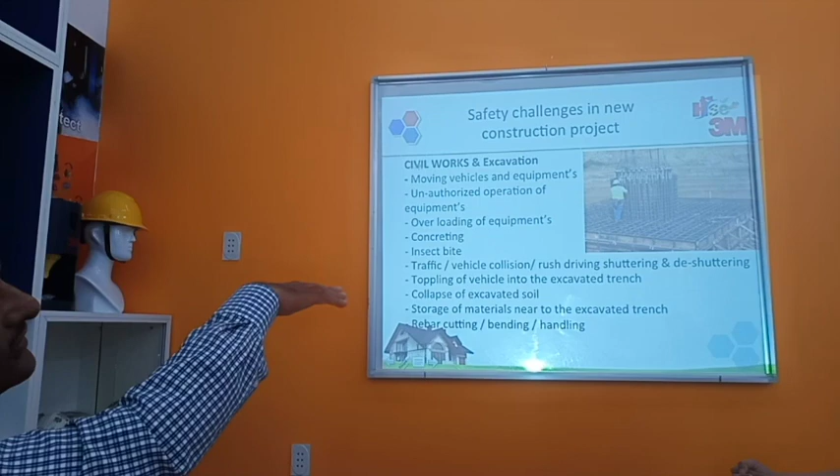safely. Reinforcement handling: depending on the size of the foundation, there will be a lot of reinforcement handling. You can keep the previous one. Yeah, reinforcement handling. This is the area where the majority of accidents happen. Depending on the type and size of the reinforcement, many times they involve the crane to shift the materials. So there will be moving equipment and unauthorized operation of the equipment.

It happens many times, mostly because people who are helpers or flagmen assisting the equipment used to operate the equipment. They don't have a license, they are not authorized to operate, but they want to learn and they operate the equipment. Overloading of equipment while loading the reinforcement, etc. Overloading of equipment also happens.

Concreting is also one of the challenging tasks. When the concreting starts for a large foundation, it may be for the whole day sometimes. So the workers remain without rest many times because of the long working hours. Proper lighting arrangement should be there. There will be vibrators for the concrete. Vibrators should have proper earthing because they're operated by electricity.

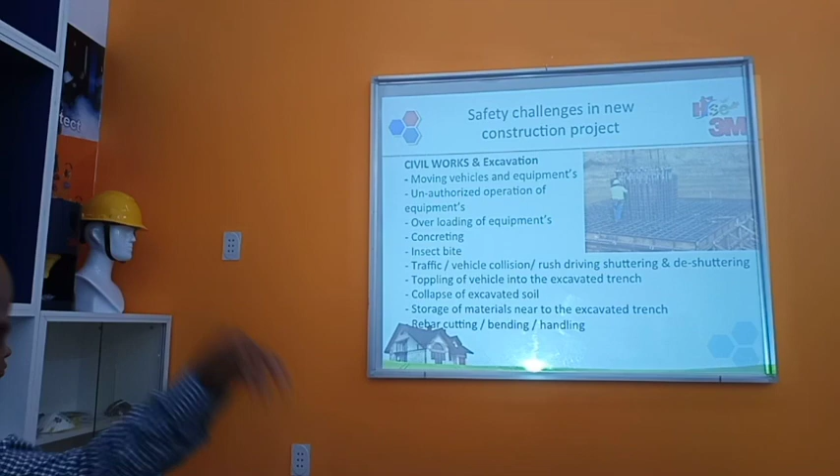And the equipment coming to deliver the concrete: we need to see that it should be 1.5 meters, 2 meters away from the edge. Otherwise, there is a possibility the equipment itself may fall inside the excavated trench. So these are the things we have to take into consideration.

Insect and animal bites, like a snake or scorpion, or even many times dog bites in the construction areas, because sometimes there is no control of the food waste. People eat and throw things here and there, and dogs and even pigs come. In India, I experienced two dog bite cases.

Dog bites, yeah, and two times the pig, the black pig, the forest pig. The pig also bit the engineers. Oh, pigs can enter into the site? Yeah, because it's a very huge construction site, 60 kilometers long. So it's very difficult. Sometimes the fencing work is going on, so they can enter very easily.

Traffic also is one of the biggest challenges, particularly during the construction stage. Vehicle collision, rash driving, people used to drive very fast. Also the parking arrangement, we need to have a proper parking arrangement. Otherwise, after completion of the job, people will park the vehicle here and there.

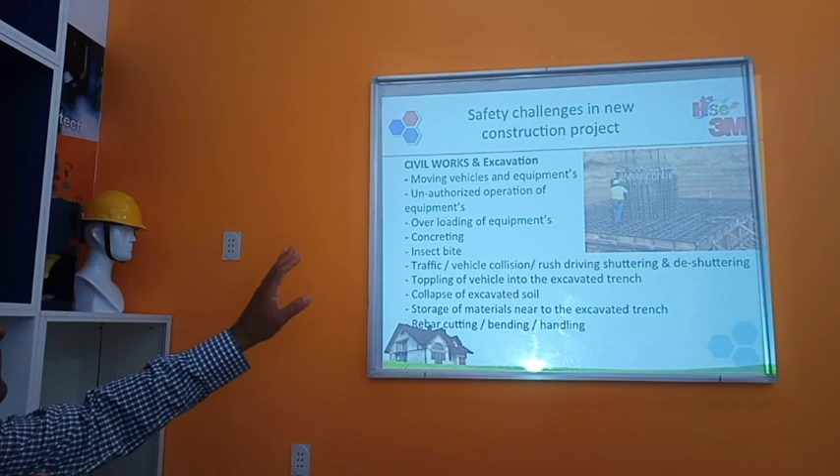And in the night, if we have some emergency, the fire vehicles, ambulance may not have access to reach the working location. Because night time we may have very limited activity, like concreting. But daytime you have so many trucks, hundreds of trucks, and when they go, they park here and there, haphazardly. There is no dedicated parking area.

In the night time, we are doing concreting or very specific work, welding or maybe erection, some limited work in the night. So we need to have proper access in case of emergency; all this construction equipment should be parked in a dedicated area.

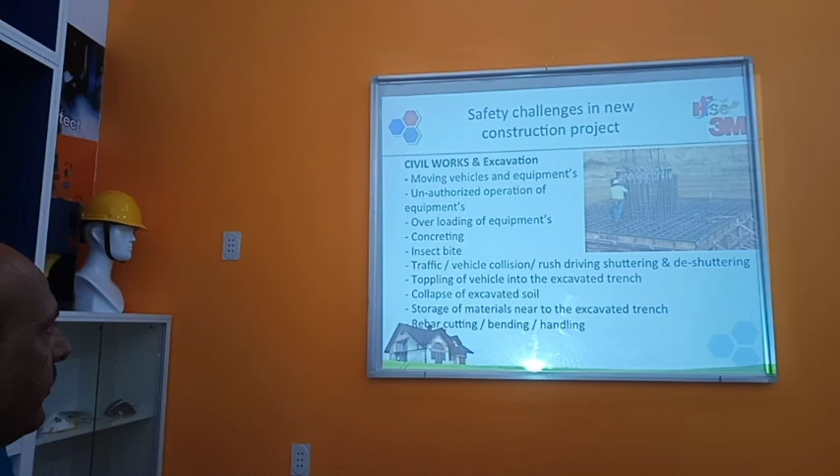Toppling of vehicles into excavated areas, then working at height. Working at height is also a major hazard, working in construction or any industry. Fall from height and falling objects, these are the two common hazards. Adverse weather conditions, sometimes very heavy wind, very heavy rain. Material handling at height: sometimes we lift the material with the crane, sometimes with the rope.

How about SIMOPS? Yeah, simultaneous operation, SIMOPS, working one above the other. This has to be avoided, but in construction it's not practicable; it's not possible to avoid, but we can control it. Because the owner has invested millions of dollars, and the schedule has to be met. So as a safety professional, they will say, we hire you to help us, not to stop the work. So we have to give the solution.

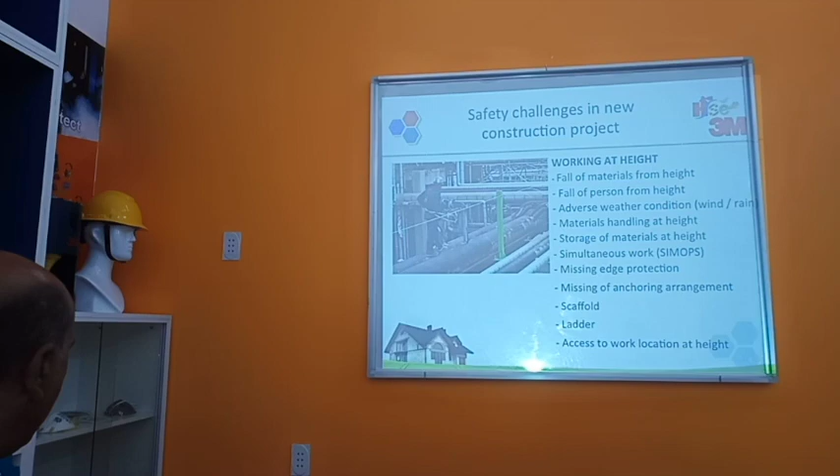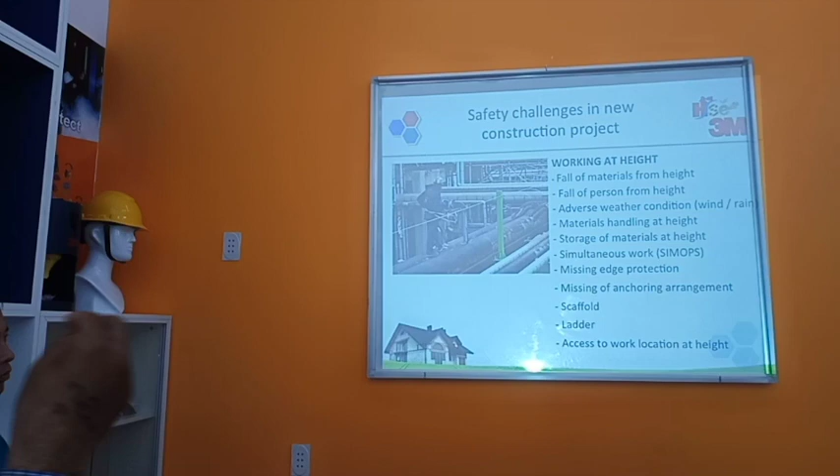Some critical work we can shift 1 or 2 hours. Some work we can do in the day, some in the night. Sometimes we can have a full deck platform, scaffolding, so anything can fall and remain on the platform and other people below can walk. Sometimes we can put a safety net to catch even small falling objects like scaffolding pipe, board or clamp, and other people can continue work safely below. So this sort of arrangement we need to do to prevent SIMOPS hazards.

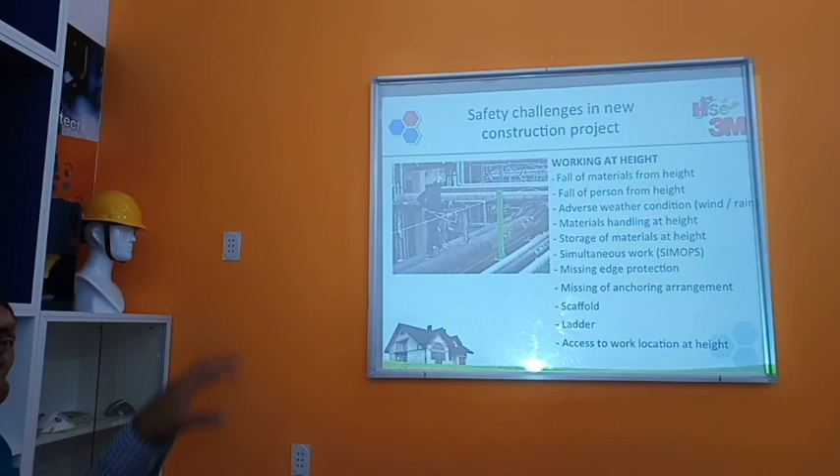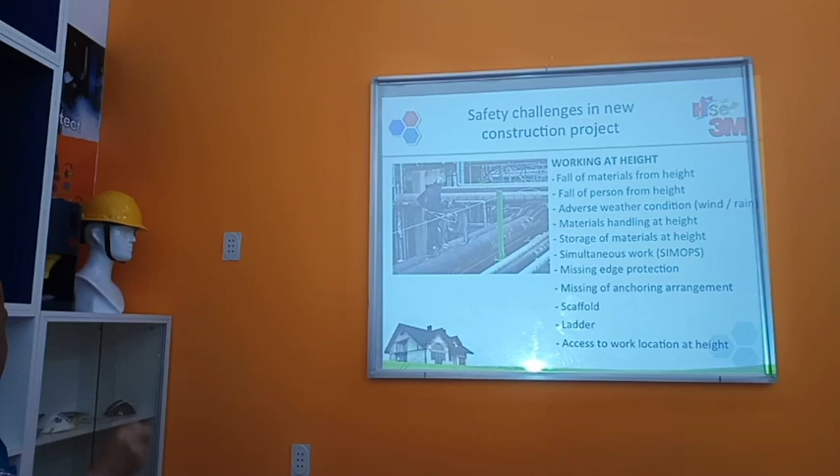Yeah, SIMOPS. When I did the research, normally, for example, in order to conduct the work tomorrow, today we put a meeting. A small meeting, coordinating the different jobs. So very important. So at area 2 during the turnaround, we had some problem with SIMOPS, right? And I think better we have a coordinator for SIMOPS.

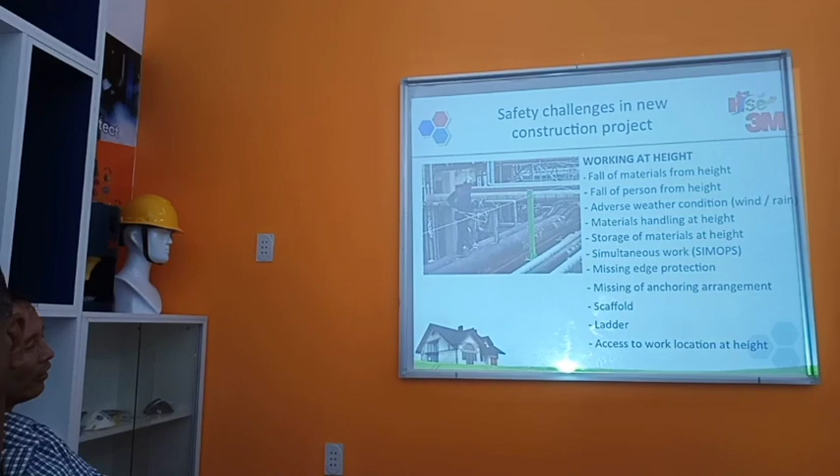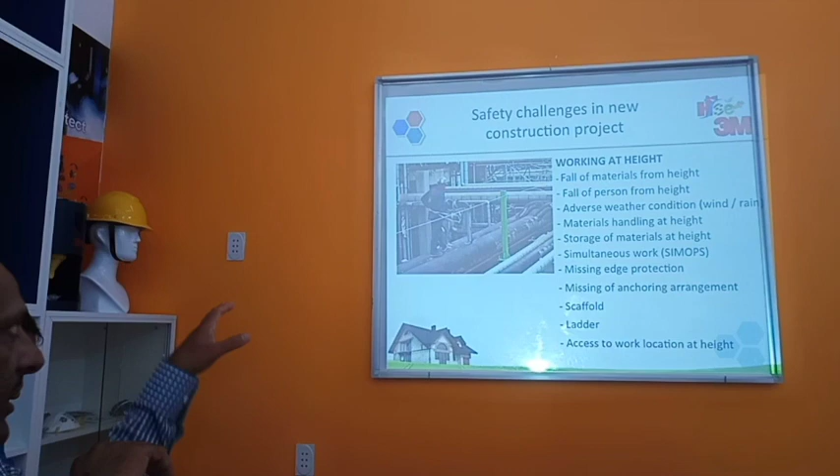Then missing edge protection is also one of the major things that happens, particularly with the scaffold. In the construction project, after completion of the civil there will be structural activity, erection of structural beams, and then you put gratings. The moment you start grating installation, there is a major risk of fall from height and grating openings. If you don't pay attention, definitely there will be a fatality.

In the Reliance J3 project, in my area there were more than 64,000 square meters of gratings. But luckily we organized and handled it very safely, and there was not even one single first aid injury on grating installation. Grating installation is really very risky work. So that time we need to put some temporary edge protection.

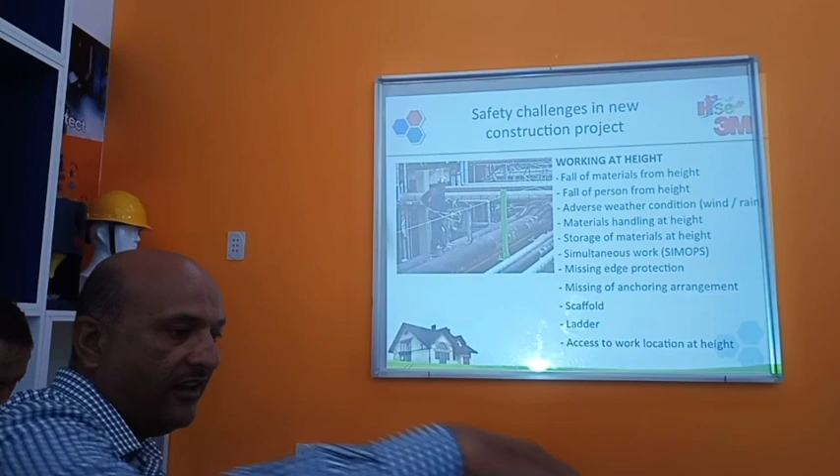For example, this is a large platform, right? So the contractor has to put the grating here. First of all, we have to divide the platform in two by putting the handrails here. In the center, we can have a temporary path with scaffolding.

And on both sides, we can have a grating installation. So from one end to another end, one safe access should be there with the scaffold. And on both sides, we can put a scaffold. Yeah, it means they have to arrange the scaffold for the safe access. Safe access way. Yeah, with the hanging scaffold on the structure for the access. Otherwise, people will take shortcuts, people will jump from one area to another area, and there may be a...

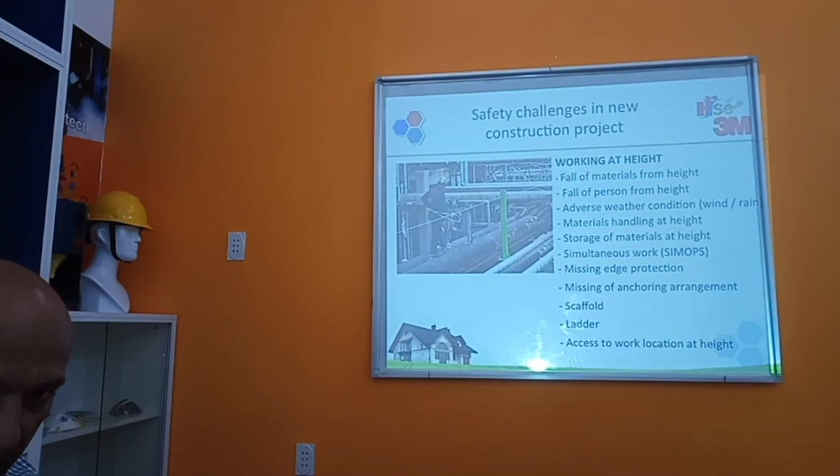So any methodology or methods in order to manage the temporary platform? Because after they install, they can put the temporary platform, right? So how to manage, how to control, for example, for the task, or any method? First of all, we need to have a safety net below the structure. Safety net, and on the structure we can have a hanging access platform, like 2 meter wide or 1 meter wide with handrails. So from one end to another end you have access, for example, right?

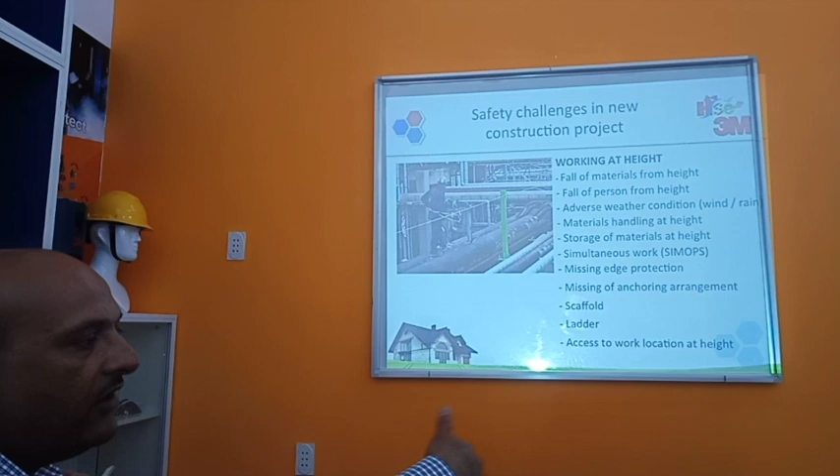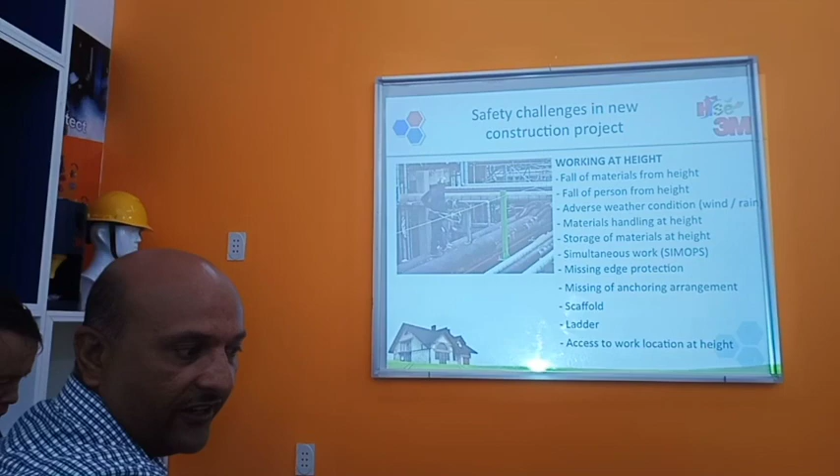And on both sides, left and right, you can erect a scaffold. You can start installing the grating. From this, for example, this step, this is scaffold access. And here we have to put a grating here and on the other side, right? So you can isolate the area. For example, you are going to install grating at this location. So you make a handrail, a scaffolding handrail, right? And isolate the area. So in this area today you are going to install a grating, and put an anchoring arrangement so people can anchor.

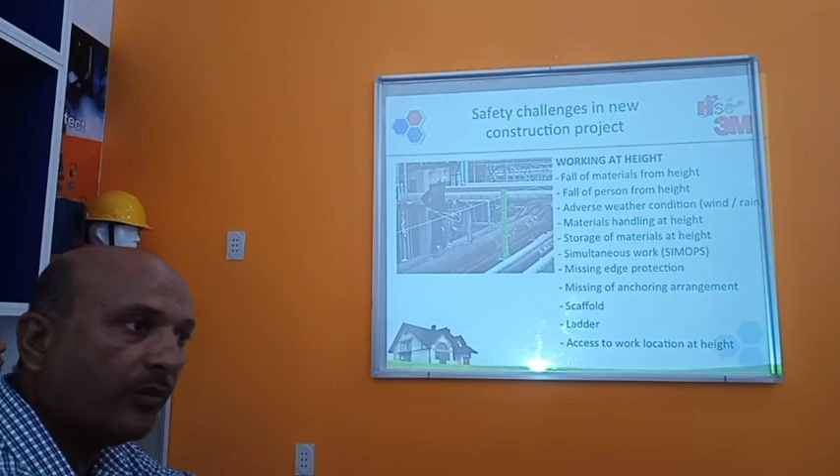And as secondary protection, you have a net. In case the safety anchor fails, the secondary protection will be the safety net. So in any case, if the grating falls or the person falls or material falls, it can be arrested in the safety net. So this is a very critical activity.

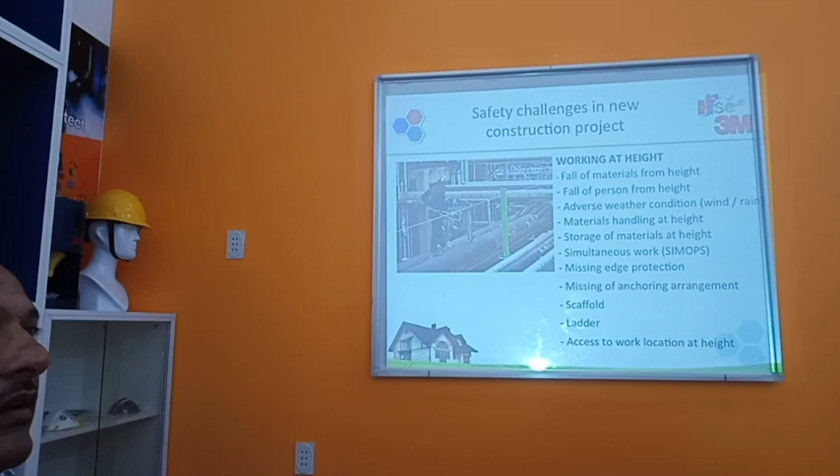But we must have a standard for the safety net, because most of the safety nets we see are fishing nets. Only the fishing net, no, it's not good. Or the insect net, no. We need to have a standard. It should be an approved safety net standard. It should be an approved safety net.

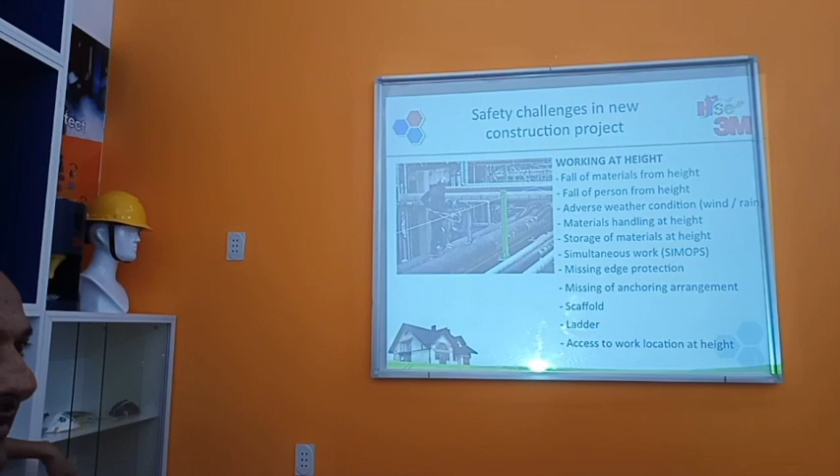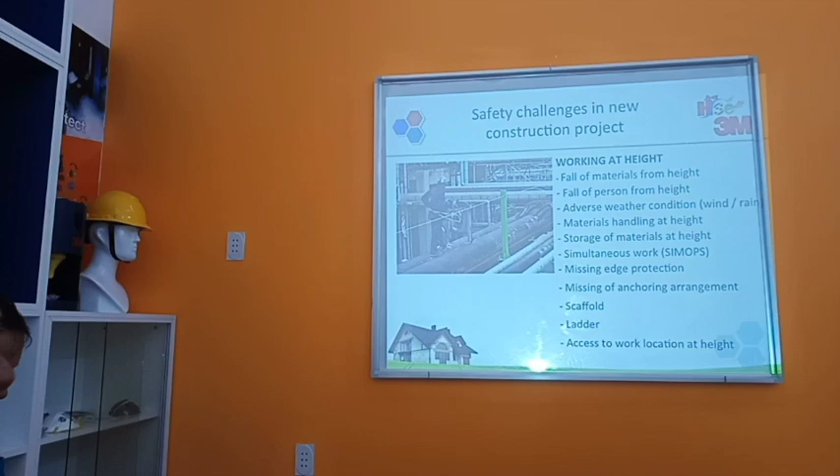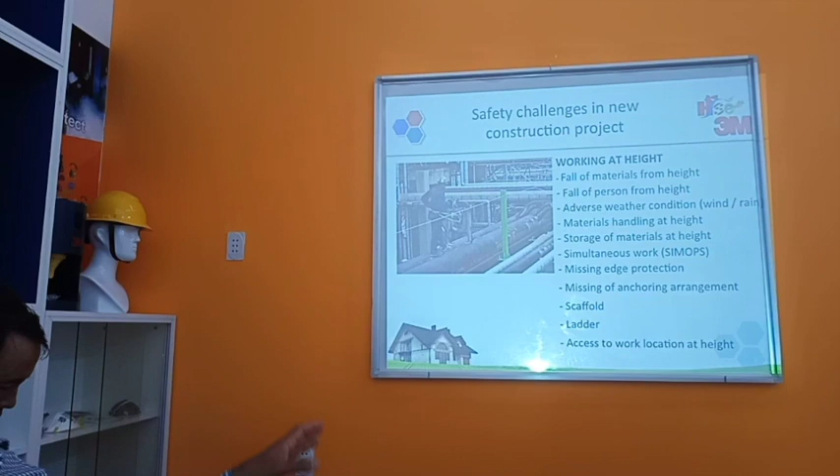And we have to frequently change those safety nets because of the ultraviolet rays of the sunlight; after maybe 3 to 4 months, it will break. We have done the drop test in construction. We dropped a bag of sand from 10-meter height, and it was arrested. And the old one, which we had used for 6 months, was breaking. So due to the ultraviolet sunlight rays, there is a change in material property. So we have to keep that in consideration.

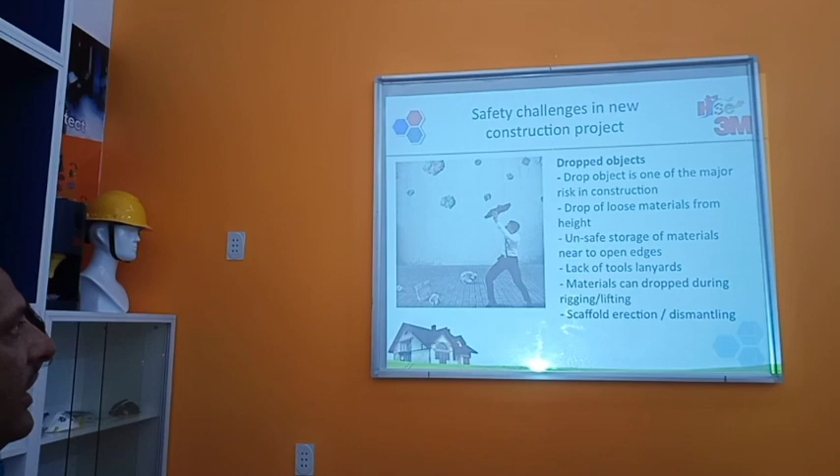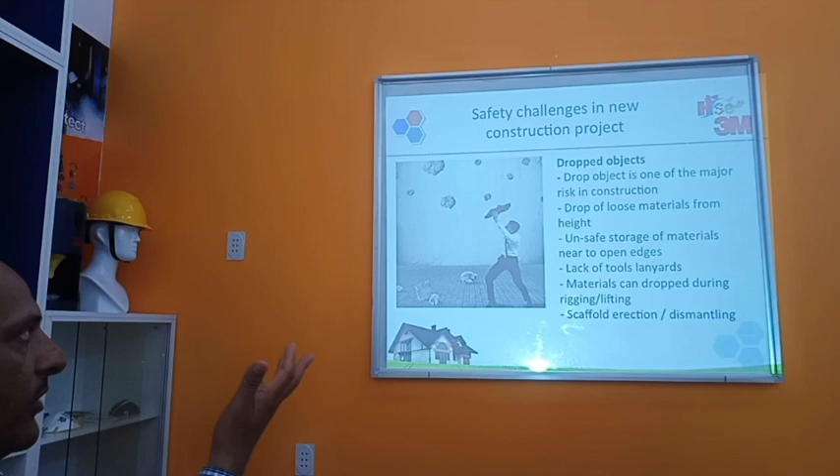Dropped objects are also one of the major risks. Drop of material from height in the construction site, drop of loose material from height, too dangerous. Unsafe storage of materials, open edges, lack of tool lanyards. Tool lanyards we may not see in construction. In turnaround and maintenance people are using tool lanyards, but in construction projects we may not see them in most places.

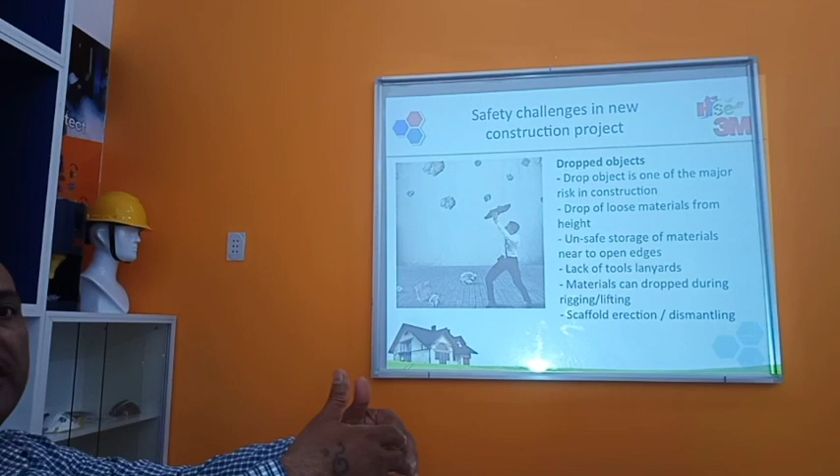Materials can drop during rigging and lifting. Like sometimes we have to lift wooden boxes, etc. So at that time we have to see that, because of the pressure from the lifting belt, the material and other things may drop. The container can be damaged.

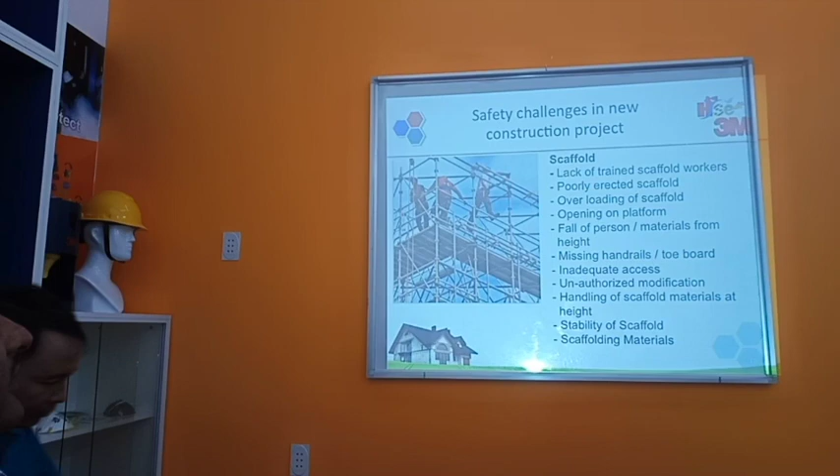Scaffolding is a major concern in construction and any maintenance industries. Without scaffolding, we may not be able to perform almost anything. So the people who are engaged in scaffold erection and dismantling should have good working knowledge. They should be trained properly.

Poorly erected scaffold: many times you may see the scaffold is not ready, it has red tag, and still people will start working because they have pressure, they have a job schedule to meet, a weekly schedule, a daily schedule to complete the task. So sometimes when people are behind schedule, they may take a shortcut. They don't wait for the complete scaffold and start working on an incomplete scaffold. Overloading of scaffold in terms of people, in terms of materials. So that also we have to keep in consideration.

Openings on platforms, because many times what happens: we have a full deck platform, but they have to do the piping erection. So if the crane doesn't have the reach, they will use a chain block. So during the rigging process, the riggers themselves will remove the board for the rigging, and when they finish the piping job, they will run away, and the opening will remain as it is. They don't bother to put it back.

So this kind of coordination is required. So what we have done, we put one scaffolding team with the rigger. So whenever you have to modify the scaffold, these two people are permanently with you; they will remove the board and they will put the scaffolding back. So every rigging gang working on different elevations for piping erection, equipment erection, where there is a possibility scaffold modification is required, they should have one scaffolding team with them. So they will modify and they will put it back in place in order to perform a rigging activity.

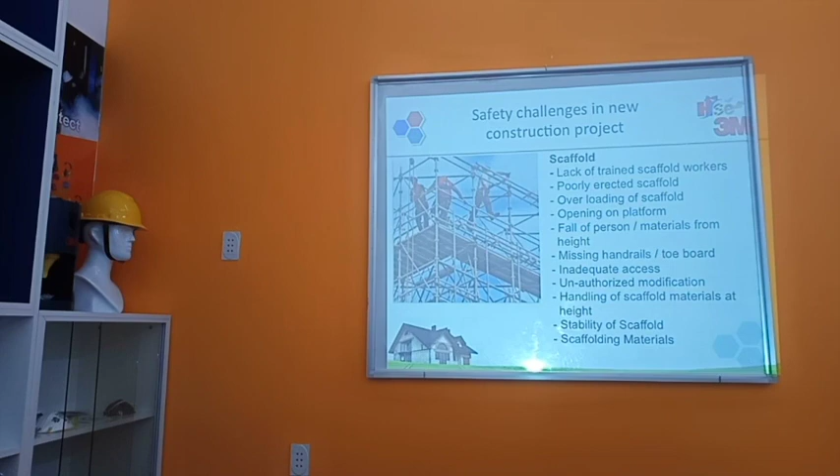See, not every rigging team may be required to modify the scaffold, right? Potentially, the rigging teams engaged for complex rigging, where the crane reach is not there, have to use the chain pulley block and other methods to rig the material at height. In that particular area, the area supervisor or area engineer will decide that this is complex rigging and may require scaffold modification. So he will allocate two scaffolding members with the rigging team, and their job is, according to instruction from the rigging supervisor, to remove the scaffold and remain standby there. As soon as the rigging activity is finished, they will put it back.

So it means it's managed through the permit to work, right? No, normally in construction, permit to work is only for hot work and also electrical work. But for the scaffold and other things, there is no PTW in the project. Only for hot work and electrical work.

And how about the scaffold after one or two weeks, when they need to extend? Normally, because many scaffolds remain at the site, sometimes people just write down the name and the time only. So how to ensure that the scaffold is workable? Do we have to organize another team to test it?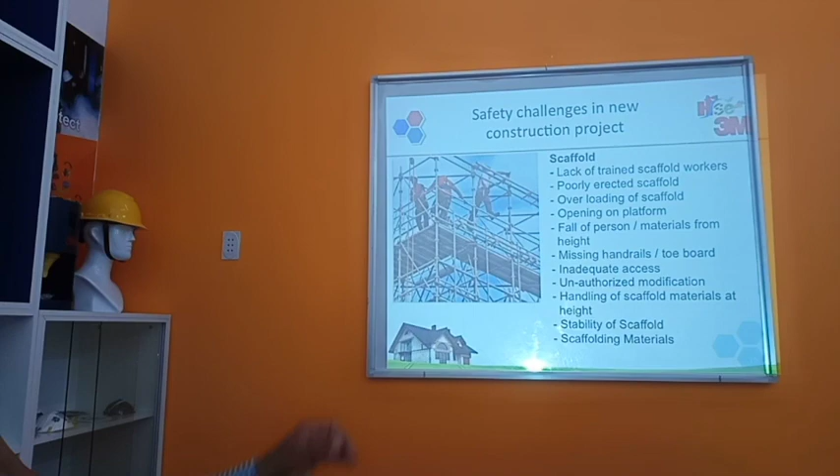But many times you see the green tag is there, but a handrail is missing, a board is missing. So again we take the reference number of this green tag and we say the green tag was issued, the checklist was filled, but the scaffolding was found unsafe. So we deduct marks. That means the system is not working. The system is only on paper.

So we should define the scaffold procedure. Yeah, I think that's the solution, right? We should audit in the contractor office, because now we just see the signature and we don't know exactly what was checked. We will develop the checklist for weekly inspection, with the reference number. Yeah, that's good, very good suggestion. The reference number should match with this checklist.

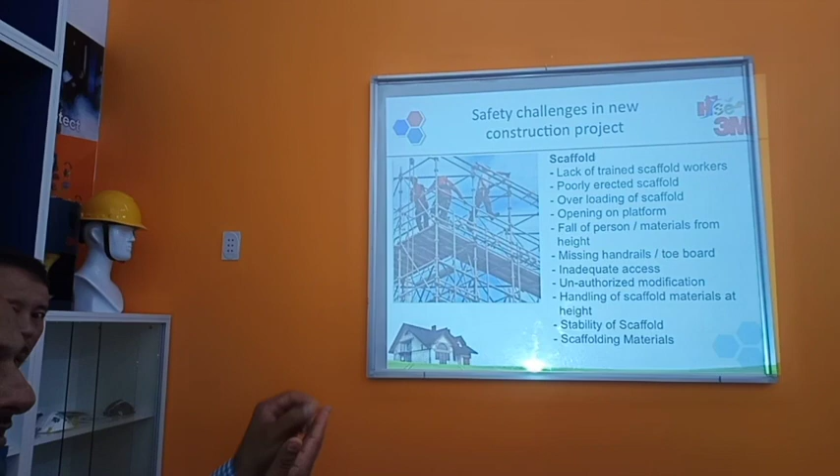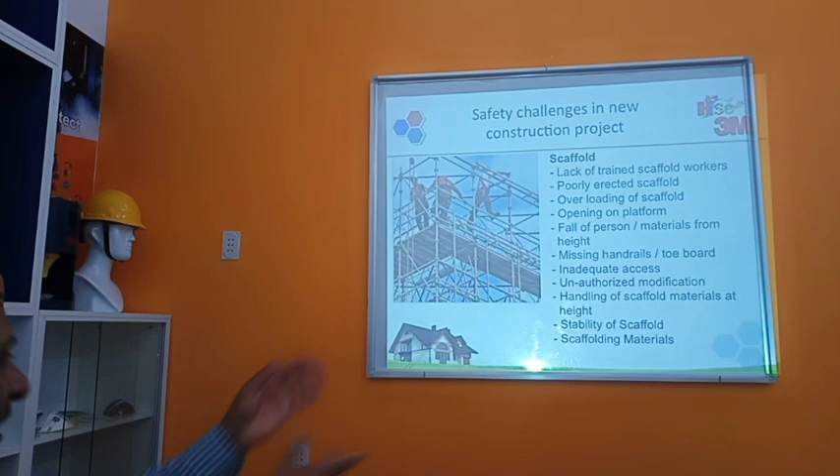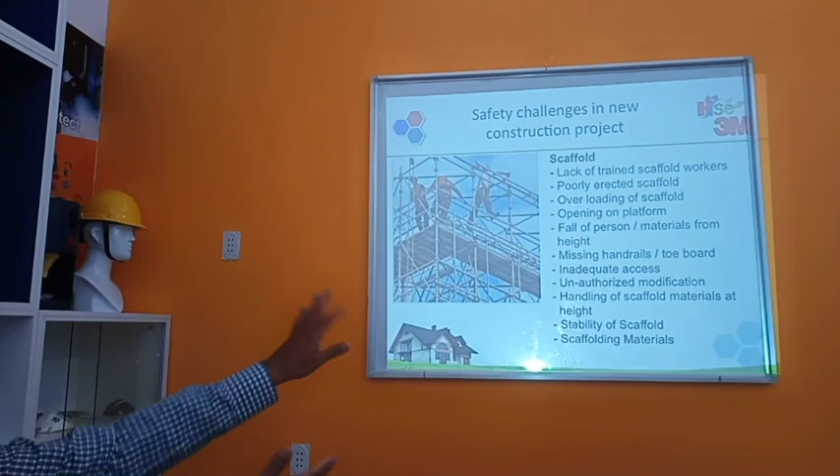So whenever you go for an audit, you take a note in your diary: scaffold reference number 638, reference number 578, and then you can ask, can you show me this checklist? If you see any deficiency, for example a handrail missing but a green tag, you take note of the reference number and ask for the checklist. When you see the checklist, they say handrails okay, board okay, access okay, but physically it is not okay. Sometimes it is only okay on paper. So we can verify.

Another thing is material handling, in various forms, from small pipes and valves and spools to heavy lift of bigger vessels. That is one of the challenging tasks, particularly heavy lift. There should be proper heavy lift planning in place.

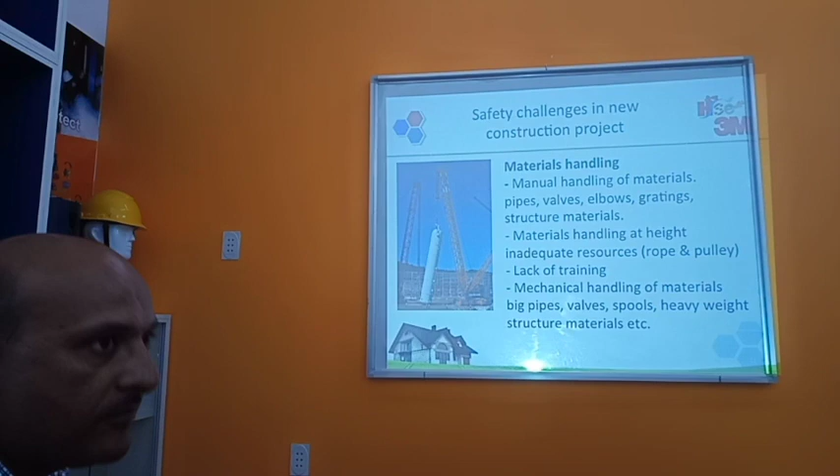Mr. Vimal, related to lifting, I would like to ask about the lifting plan. In BSR sometimes we request people that if you use a crane more than 100 tons, or use two cranes, but in construction, according to your experience, what type of lifting requires a lifting plan, and what content should the lifting plan consider?

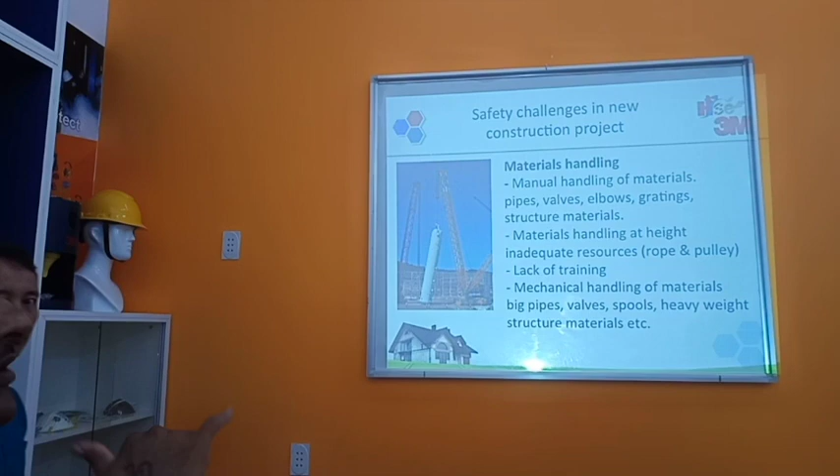In my experience on the last project, any lift more than 15 tons or use of more than one crane requires a lifting plan. If you use two cranes, or the weight is more than 15 tons, or the crane capacity loading is more than 85%, a lifting plan is required. When we use a tandem lift with two cranes, regardless of weight, a lifting plan is required, and also when the weight is more than 15 tons. This is what we followed in my last project.

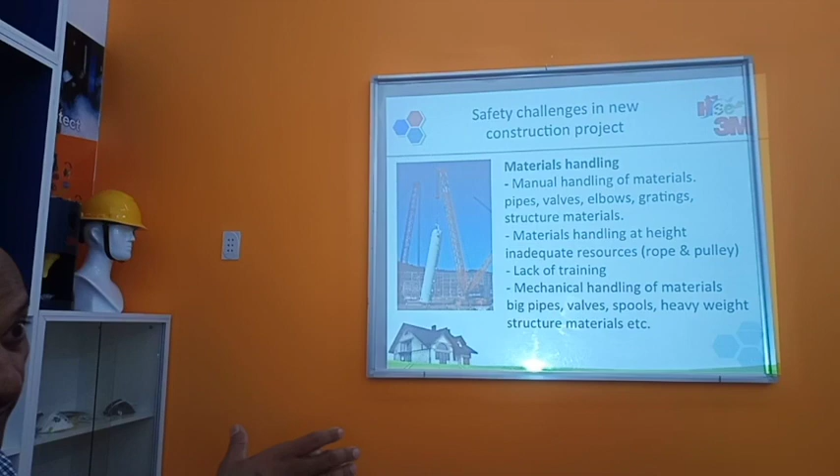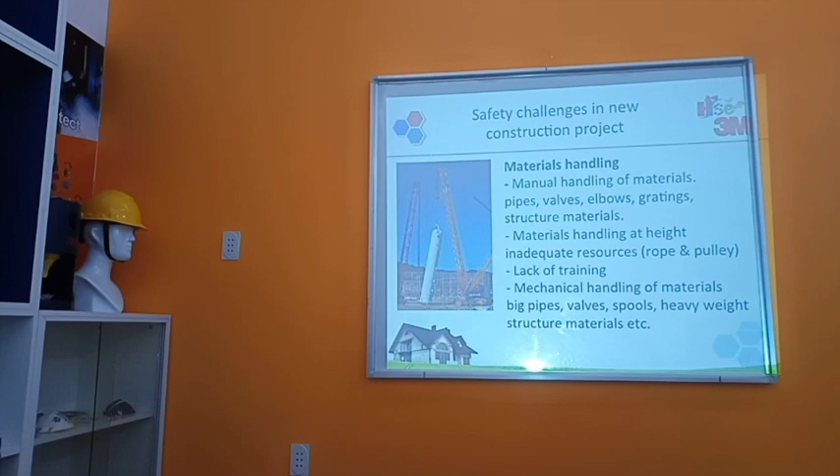I think this is fair enough. But the important content to consider includes crane capacity and capacity loading. For example, if we have a 10 ton capacity at 20-meter boom length, what percentage of that 10 tons are we utilizing during the tandem lift? That calculation follows the load chart, and we need to verify whether the figures given by the contractor or maintenance department are true and matching. From an HSE point of view, we need to verify this by checking the load chart.

Physical hazards - yes, we need to see the electrical design, electrical hazards. But toxic gas may not be present. Sometimes vessels are preserved with nitrogen, and we have to be very careful because the vendor or supplier gives equipment to us with preservation. There should definitely be a warning sign that the equipment is preserved with nitrogen. So when we open it the first time, we need to make sure the ventilation runs continuously. We need to do the atmospheric test, check oxygen level and other things, and then permit the entry. Another question related to ventilation fans.

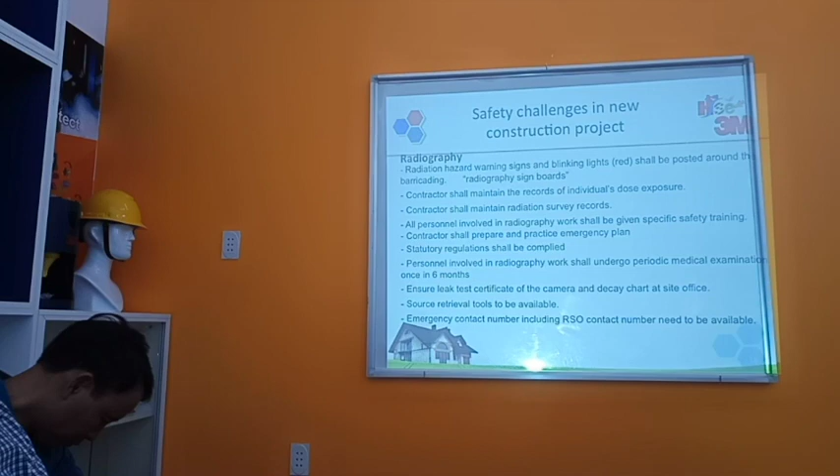Proper connection of the gas hoses - they should have a proper connection, that we need to see.

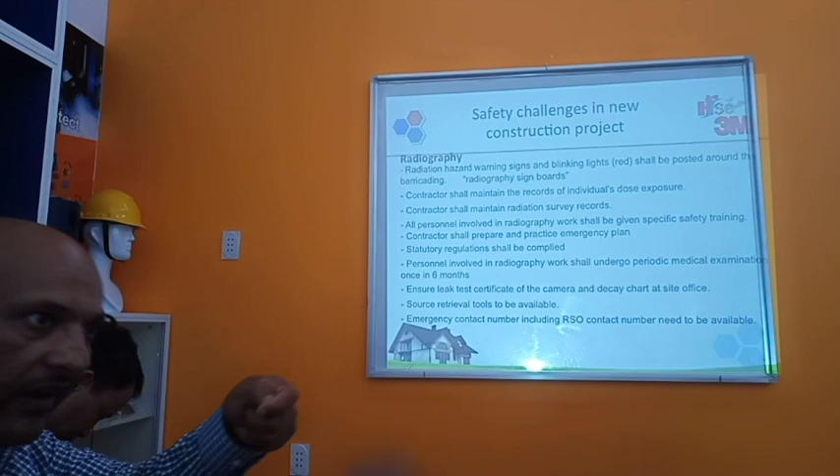Mr. Vimal, come back to the LPG cylinder - so you say that LPG cylinder is only designed for cooking. So at our refinery, we have some locations to use LPG cylinders for pilot and the flare, the boiler - it's acceptable for heating purpose, right? For heating, when they do the wrapping, that time they're using LPG, that I have seen.

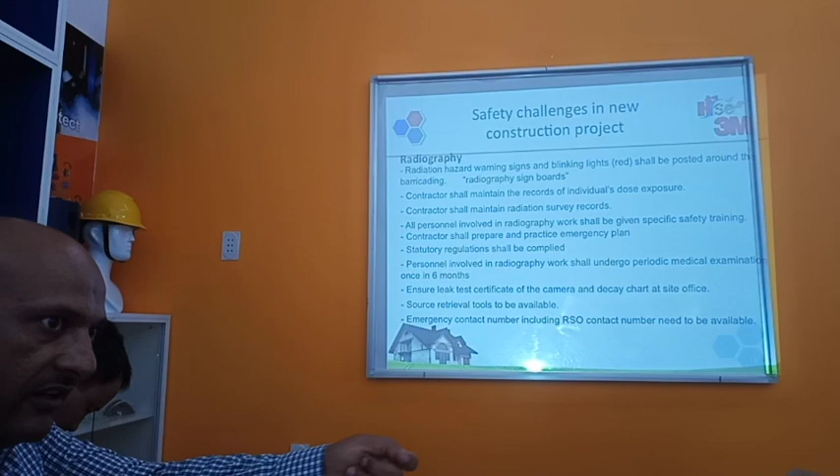Yeah, because it is LPG for wrapping of the pipes, for the heating. But now that time they add the pilot - you add the pilot for spark, the flare, that is okay.

It's okay, right? But that is designed for cooking, meaning for in-house, not for outdoor. It is for the flame, because when you do the gas cutting you need a certain pressure. But when you do flaring, it's the same gas - for wrapping the pipe, wrapping and coating, they make it like a burner, so there's no pressure, it's just a free flow with the flame.

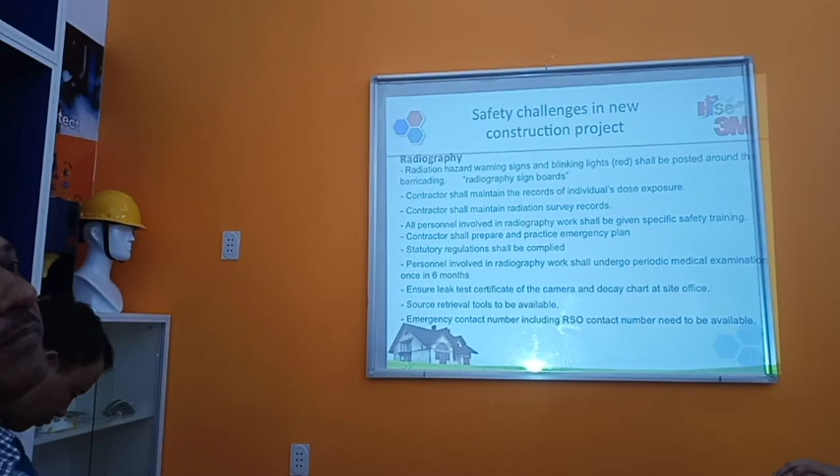But I say the design of that cylinder is for in-house use, but we use it outdoor, for industrial purpose. Because for in-house use, the cylinder body itself is not designed to have other impact - in the domestic area you don't expect any major impact of a falling object or other things. But in a running plant or construction project, there is a lot of risk of falling objects and other impacts.

Radiography is also one of the major concerns when we start mechanical work, the piping, welding and other things.

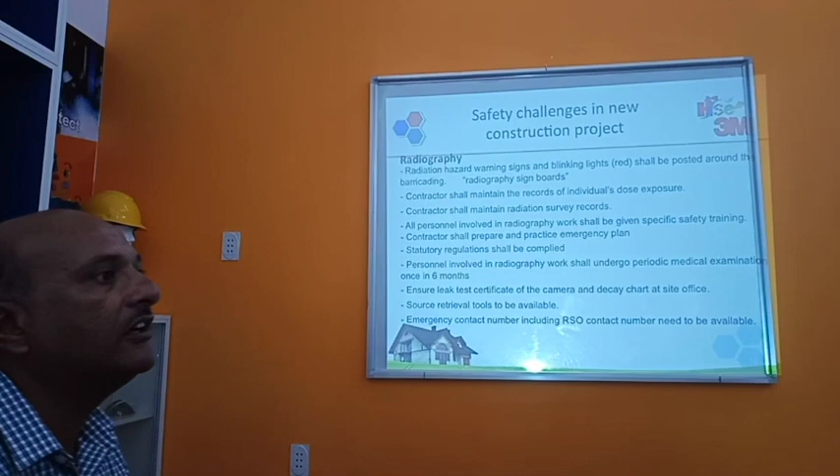With PTW, we can coordinate and suspend other works. Once the radiography contractor reaches the construction superintendent or area supervisor, they will be made aware that today the radiography contractor is going to perform radiography from this time to this time at this location, and what are the affected areas, how many meters the job has to be suspended. So when he issues the permit, he takes note and coordinates with other contractors that tonight this area has to stop work. So this coordination is required.

In the operating plant, we have the PA system so we can easily notify all the people. In the construction site there's the big announcement channel. Then we need to coordinate verbally, by telephone, or by coordination meeting, and they need to go around and patrol the site.

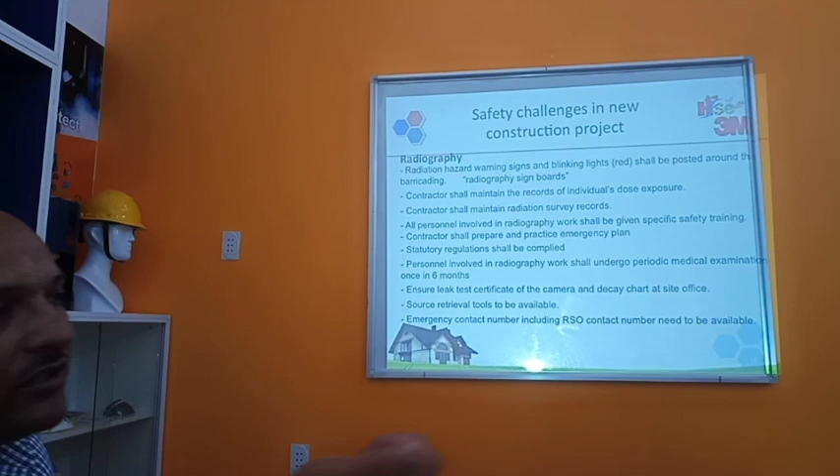They need to check with the dosimeter. The dosimeter will give you a measure of the radiation, and how many meters.

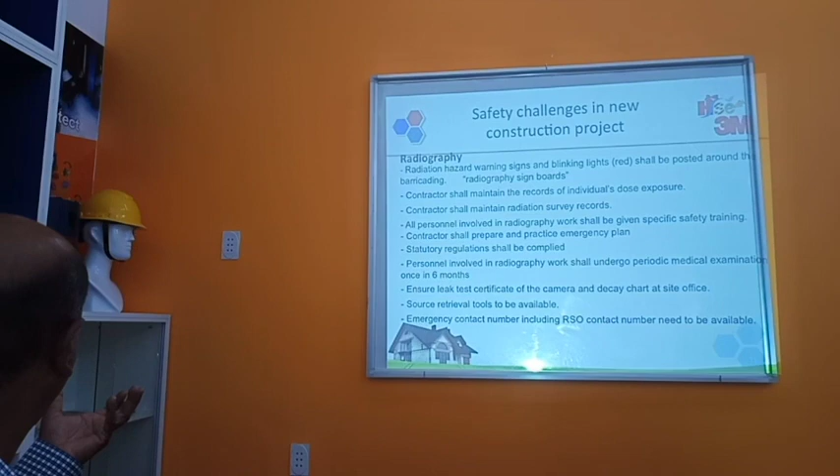The radiation distance is determined according to the survey, and also based on the strength of the radiographic source. The radiographer can calculate how many meters distance the radiation requires. So the dosimeter is just to cross-verify whether the calculation is correct or not.

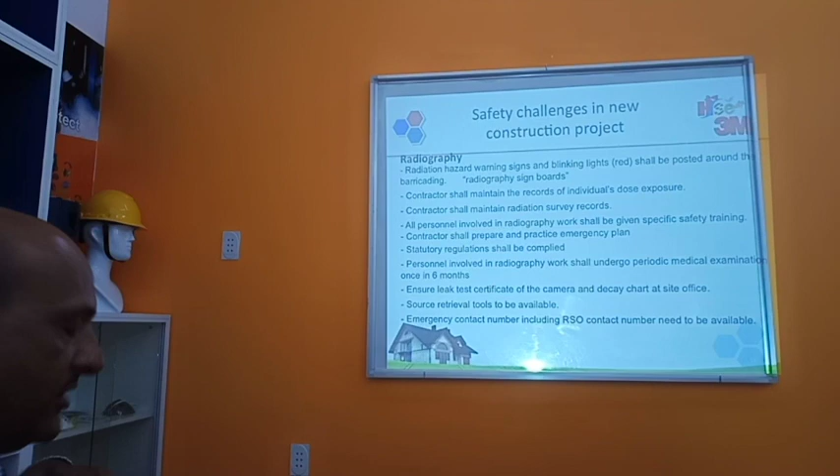The radiography team should have a film badge, so they monitor the exposure on a weekly basis to see what level of radiation a particular radiographer is exposed to. So these are the things we need to keep in consideration.

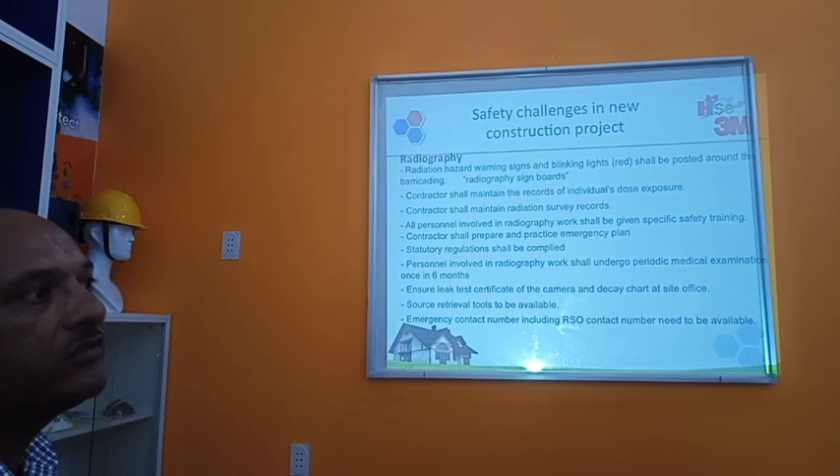After radiography, pressure testing is also one of the biggest hazards. There are two types of pressure testing: pneumatic and hydro test. The pneumatic test is more dangerous than the hydro test. The hydro test is done with fluid like water, but the pneumatic test is done with air, and air being more compressible can create bigger pressure compared to water. So a lot of things need to be taken into consideration.

Before any pressure test, we need to ensure that all the flange joints and valves are properly fitted as per the drawing. So there should be a line walk to ensure all the bolts and flanges are in place, and then there should be a complete thorough check by the pressure testing supervisor.

We need to have a permit also for that. There should be a pressure testing checklist covering everything we need to verify: barricade management, area verification, sign boards, availability of pressure gauge, the hose, the whip checks, the joints area. These are the things we need to keep in consideration.

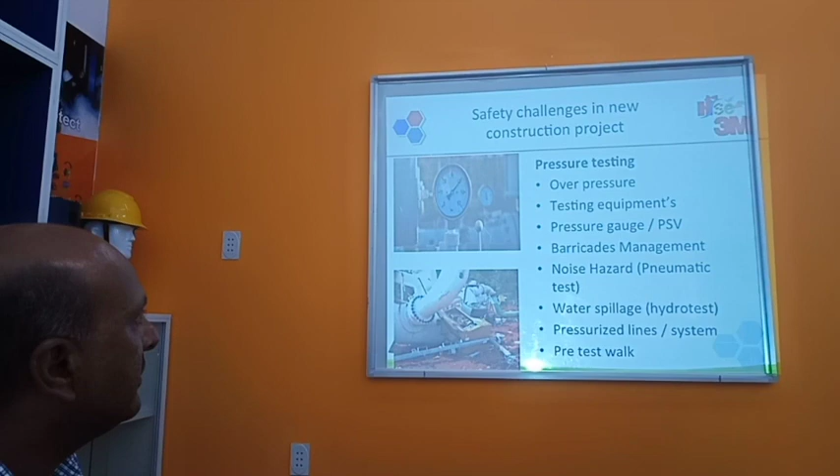This is called the pneumatic test, right? Normally it's a separate area with fencing surrounding, the testing bay. If you are testing a particular spool, you can test there, but for an entire line after the tie-in in the pipe rack, you have to do the entire line pneumatic test on the spot, on the pipe outside the rack.

For pneumatics, you cannot use hydro test, because depending on the specification and service of that particular line during the process, if you use water it may lead to issues of corrosion and water content remaining inside. So pneumatic is strongly recommended for certain service lines, and you have to do this very dangerous job on the spot with the complete line.

This is also one of the QC requirements before putting the line into service. Those tests need to be done.

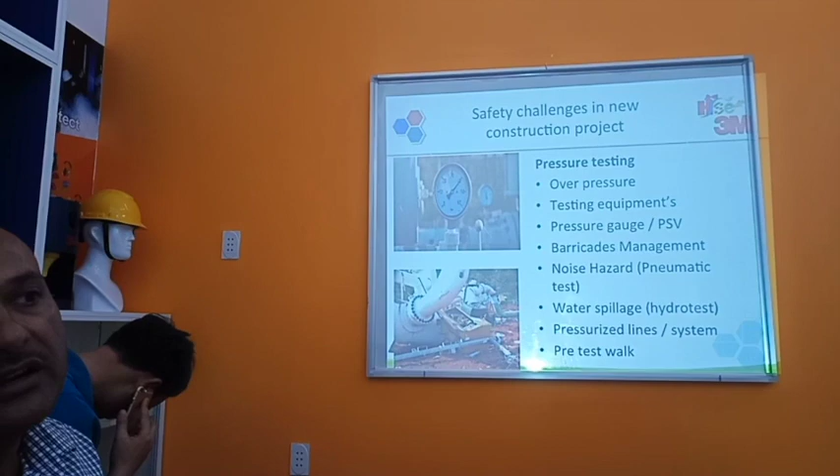How many meters of safe distance are required from the pneumatics? That depends on the pressure, the pressure exclusion zone. We have a calculation, a regulation, and the exclusion zone is to be decided by the testing engineer. Also, you need to barricade like in the radiography, barricades.

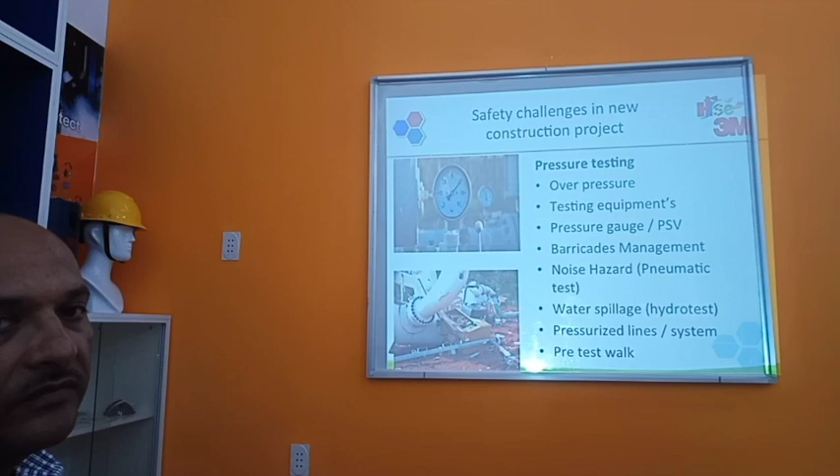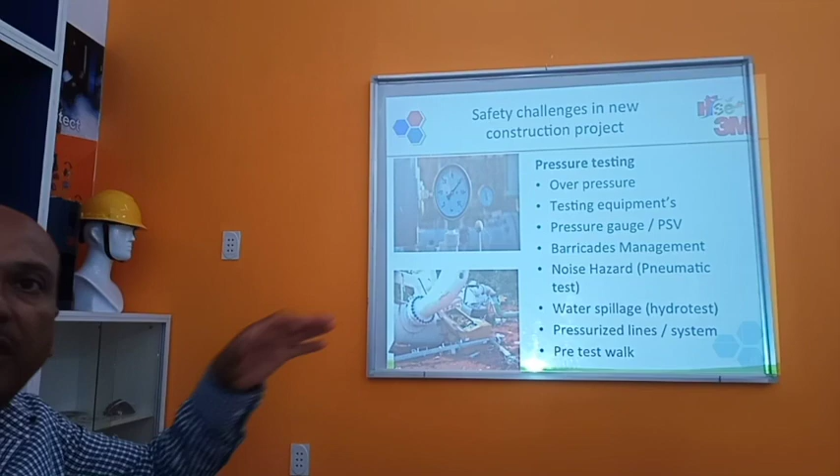You can see this in practice, but I wonder if it's applicable on the contracting side. Even soft barricades are acceptable; hard barricades are practically not possible because you have a very large area to barricade. So they require a team to walk and test the surrounding area. If you have a pneumatic test with high pressure and a very big line, then in addition to signboards and barricades, you need to keep some people on standby to make sure no unauthorized people are crossing, because in construction you may have a lot of people.

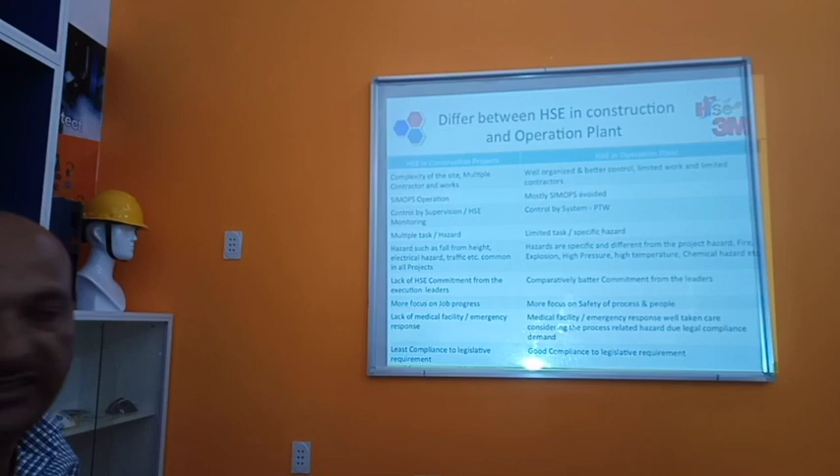Normally this kind of test is done on Sunday or during the night time. Yeah, non-peak hours, where the workers are very limited and the movement is very restricted, during the holidays, Sundays, or during non-peak hours like night time. Yeah, same as regular.

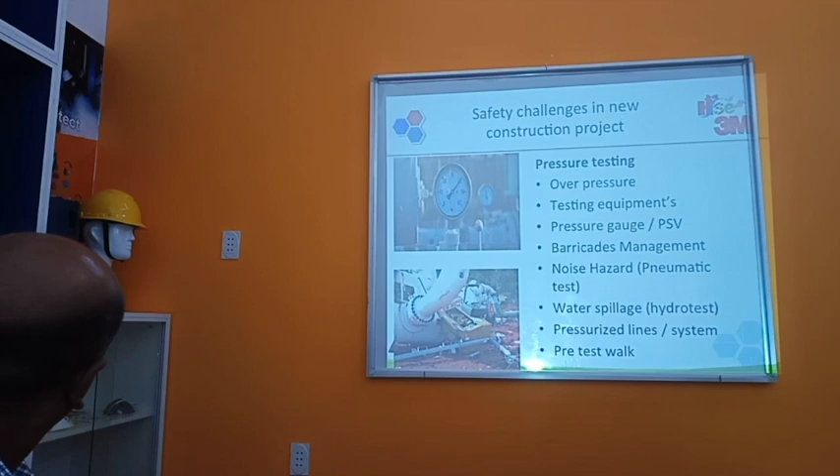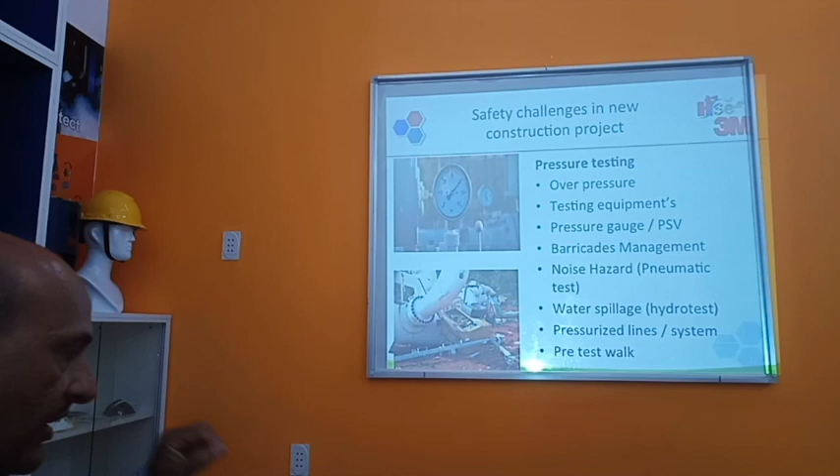But for barricade management, normally we don't know how far we barricade. That depends on the pressure. The testing engineer has to calculate the exclusion zone. They will give a calculation and sketch attached with the checklist or permit that this is the exclusion zone based on this calculation. So it is the responsibility of the testing engineer to fill the checklist and give the exclusion zone, how many meters, to be verified before they start the testing. They have to approve the checklist.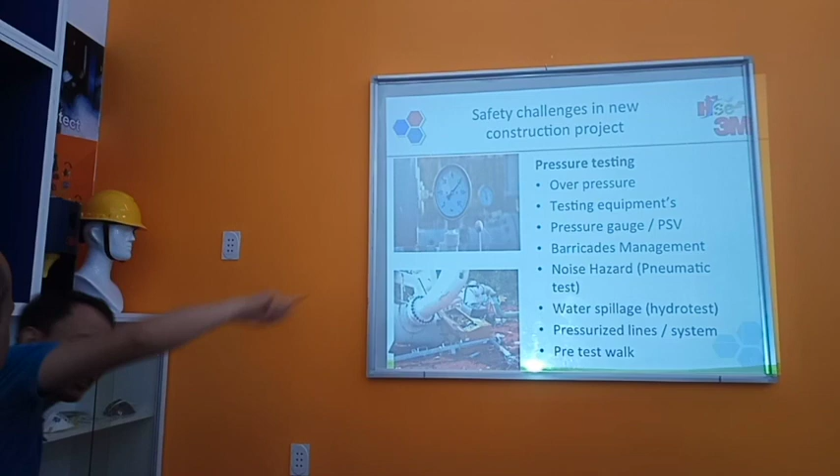Normally outside, in the general barricade, how high is the barricade? Then I think we have to make a standard. The checklist, and I remember in our procedure we have mentioned the space and how to verify. Next.

So as we were discussing, the difference between construction and operation plant, particularly in terms of HSE. I am very fortunate that I have had an opportunity to work in different industries. I started with construction, refinery, then I moved to train operation and maintenance. I worked in offshore drilling upstream, ship repair, LNG, FPSOs. And then I had the opportunity to work in refinery operation with you all. Not all people are as lucky as me. I feel very lucky to gain this experience.

So on the construction side, we have a complexity of site, like multiple contractors and works. At the peak time, you will see the civil contractor, mechanical contractor, structural contractor, piping contractor, painting, insulation, instrument, electrical, cable tray installation. In one pipe rack, you can see 10 contractors. Some are doing underground pipe work, some civil work, some piping erection, some welding, some structural erection, cable tray installation at the top, cable pulling, cable laying, so many multiple activities.

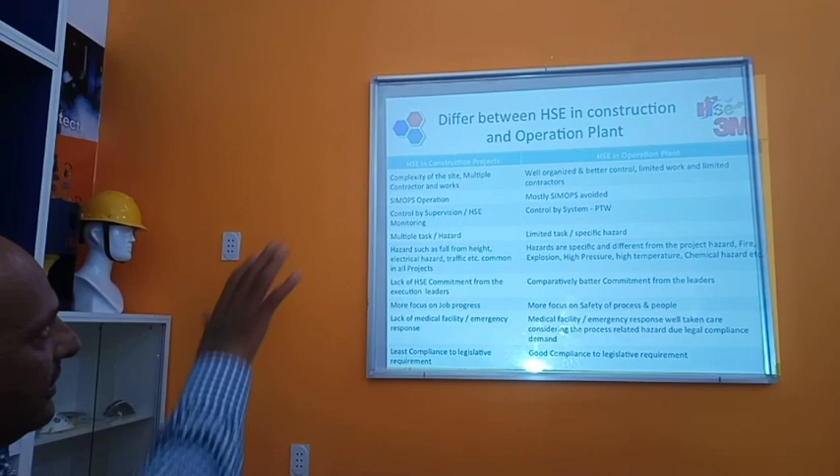But in operation, we have well organized, better control, limited contractors, permanent contractors, almost permanent workers, except the turnaround. SIMOPS we cannot avoid in construction, but it is mostly avoided in operation. Only in turnaround we may see SIMOPS, but there also we have good supervision, good HSE monitoring with coordination. We have toolbox talks and the permit to work system. SIMOPS can also be controlled with PTW, right?

If somebody is doing painting here, and I am a PTW coordinator, I will not issue a permit for hot work because I have given a painting permit for this. So with PTW you can avoid SIMOPS, but in a construction project sometimes you may not be able to. So do you have any procedure to manage SIMOPS? We need to have a SIMOPS coordinator. If we don't have a SIMOPS coordinator, then we need good supervision, HSE supervision, execution supervision. If we apply these things, I think it's very important.

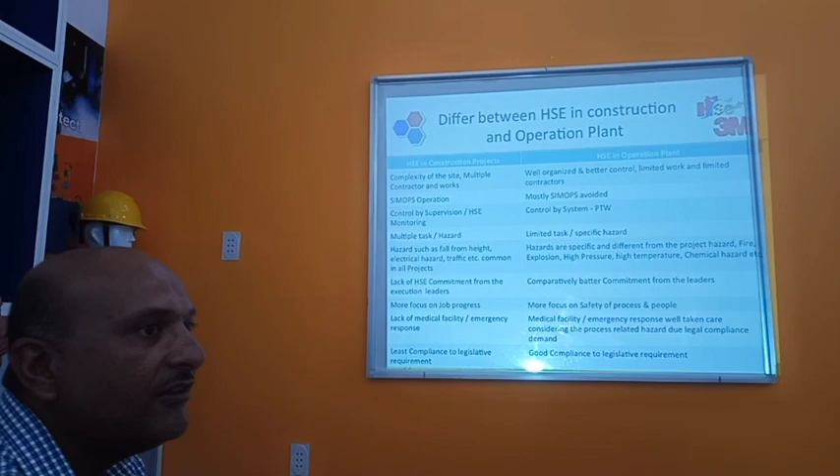For example, what happens in the project? Somebody is doing excavation work for an underground pipeline. Somebody is doing above ground piping erection. Safety will come and say, I will not allow work underneath. He will say, I will work. If you tell the above ground piping people to stop the work, they will not stop. So if we have a SIMOPS coordinator, he will coordinate with the construction manager and decide which one is the priority, above ground or underground, depending on the scope of work, and one job can go ahead. Or if both have to go ahead, additional safety precautions may be required.

But I think SIMOPS we can control by the detailed schedule. Very difficult. Yeah, you have to schedule the work, but SIMOPS is about the location, right? And the detail of the job. Yeah, but our plan also.

Micro planning is very difficult in construction. For example, in package 3 during turnaround, we have the ground job, and then there is some welding activity. In construction, we control by supervision and HSE monitoring mostly. But in operation, we control by the system like PTW, isolation, and so many other safety procedures. We still apply it for limited work, not for all work.

So the question, in case now we have a big bang project, do we apply permit to work for all, or not for all? Not for all. Difficult. Each time they define it, apply the principle. But outside also, for hot work you need to have a permit. For confined space you need to have a permit. For working in a live electrical system you need to have a permit.

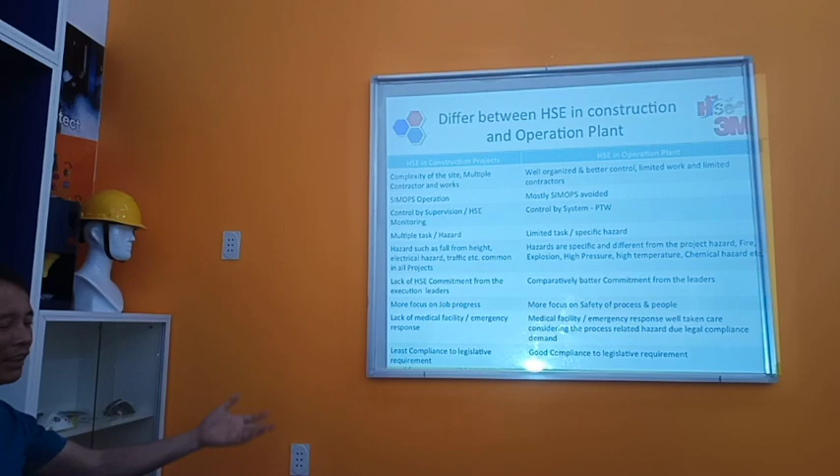I mean that during our expansion projects, outside the battery limit is the scope of the contractor. You are the owner. Legally you are responsible. But our role and responsibility is limited for outside the battery limit. Inside battery limit, yes. But outside we are involved, not deeply, in meetings or something like that, and we assign one or two people. But the project team will be more responsible.

The project execution team. It depends on them what procedures they follow. They will have a separate procedure or they follow your operation procedure. Normally they should have a separate procedure for the project. So it depends on their procedures. If they have incorporated this requirement, then they have to follow. If they have not incorporated it in the HSE management system, then they will not follow.

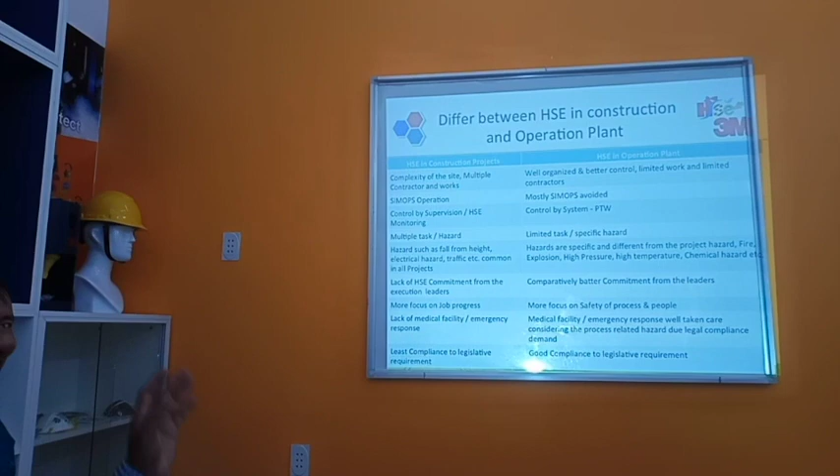So, Mr. Vimal, in your construction plan, if they do not apply permit to work for everything, how do they control critical work such as scaffolding? Scaffolding is very common. You will see thousands of scaffolding jobs, so it's not possible. For ground work, no need. For the project, no need. But there will be a checklist, and a lifting plan or certificate for lifting work, that's all. So this is the reason why there are a lot of accidents in projects.

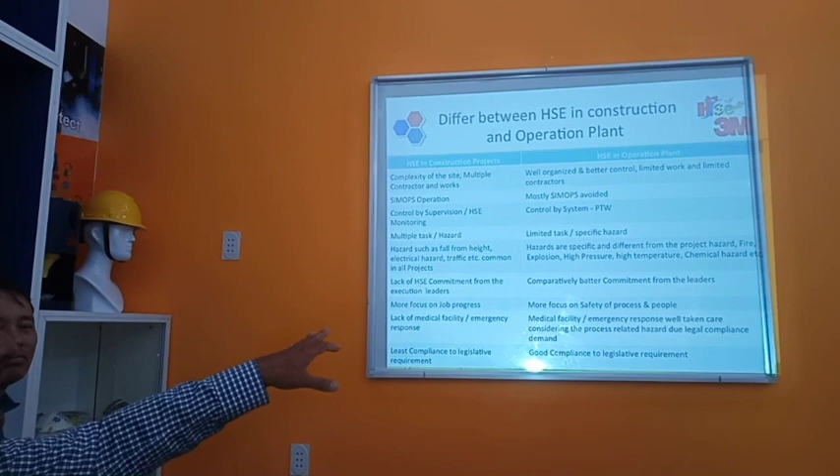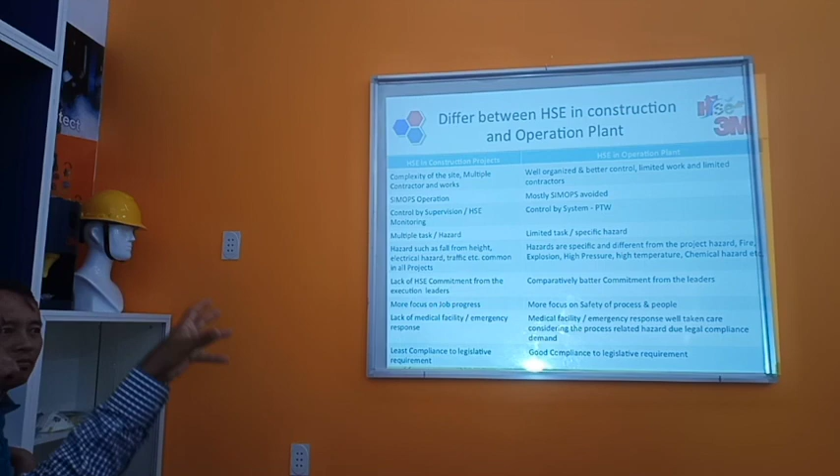And if you talk about construction, there are multiple tasks and multiple hazards, from low severity to high severity. But in operation, we have limited tasks and very specific hazards, like fire, explosion, toxic gas release. In the project, every new stage brings new hazards. When we start the civil work, we have limited hazards. The moment you enter the mechanical phase, you introduce new hazards, and at commissioning, different hazards again. So we need a better HSE management system in place to control the hazards.

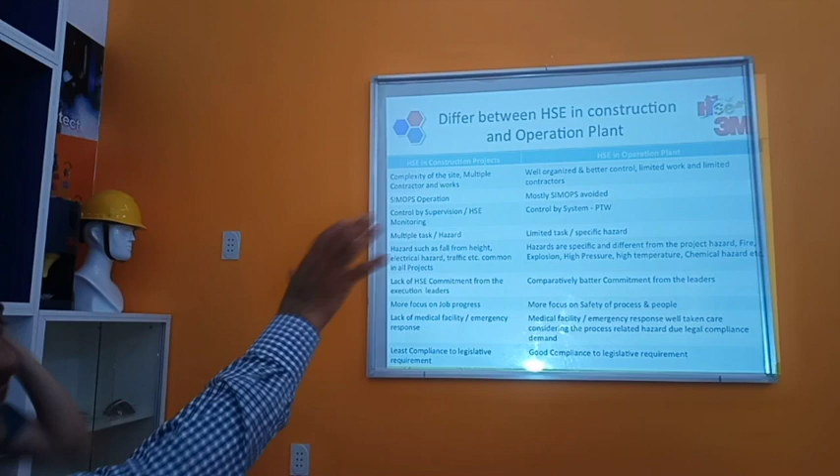In construction, fall from height, electrical hazard, traffic are the common hazards. In the process, we have very specific fire, explosion, high pressure, high temperature, chemical hazards. The risk is limited, but the consequences are bigger. Lack of HSE commitment from the execution leaders many times, because they have a lot of pressure from top management to execute the job and meet the target. But comparatively better commitment from the leaders in process plants normally.

More focus on job progress. In operation, we have more focus on the safety of process and people. That is always the priority. Lack of medical facility and emergency response we may face many times in construction projects, so we need to make sure good medical facilities and emergency response are ready in case of any unplanned event. In operation, we have better medical facilities, a good emergency response plan and team, considering the process hazards and legal requirements. We also have comparatively good compliance to legislative and government requirements in process industries.